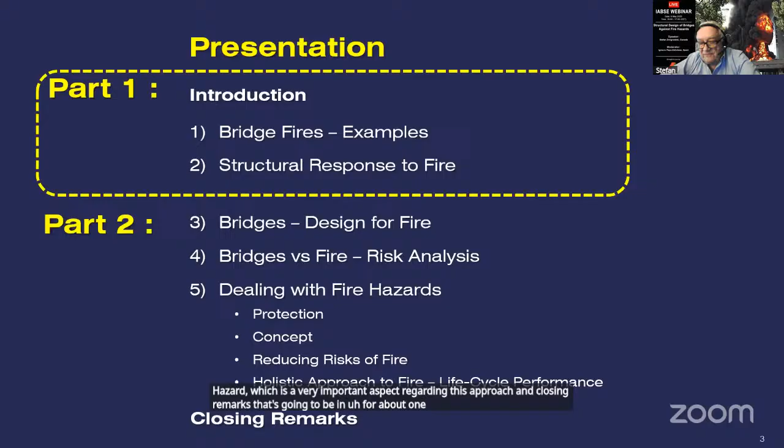Part 2 will be dedicated to the design of bridges for fire, risk analysis, as well as dealing with fire hazard, which is a very important aspect for this approach, and closing remarks. That's going to be in about 1 month, in June, the 5th or 6th, to be precise.

So let's go to the first part. I have to mention this has been prepared some time before, and we refer to publications that are about 10 years old, but still very appropriate.

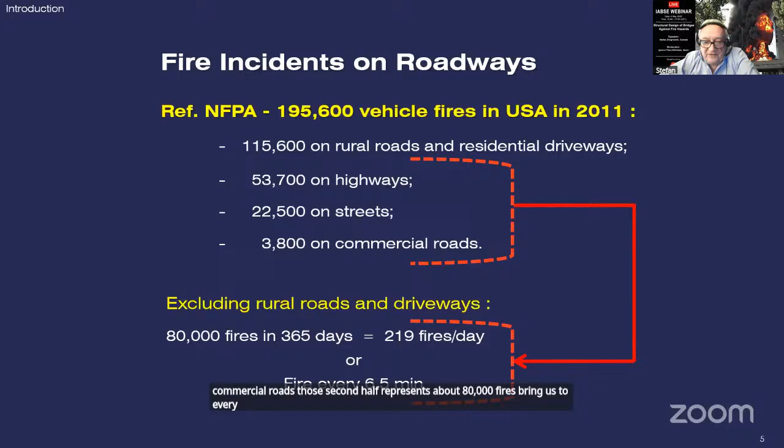The first is an NFPA report published in 2011, reporting fires in the USA: about 200,000 which have happened, most of them on rural roads and driveways, and half on highway streets and commercial roads. That second half represents about 80,000 fires, bringing us to a fire happening every 6.5 minutes in this period.

Another reference is a survey done by McCabe reporting causes of bridge failures based on the reasons. Most are hydraulic, followed by collisions, overloading, deterioration, and fire, which represents about 3% of collapses reported. But before earthquakes—and why I underline why—other causes like ice, fatigue in steel, design problems, etc., each represent less than 1%.

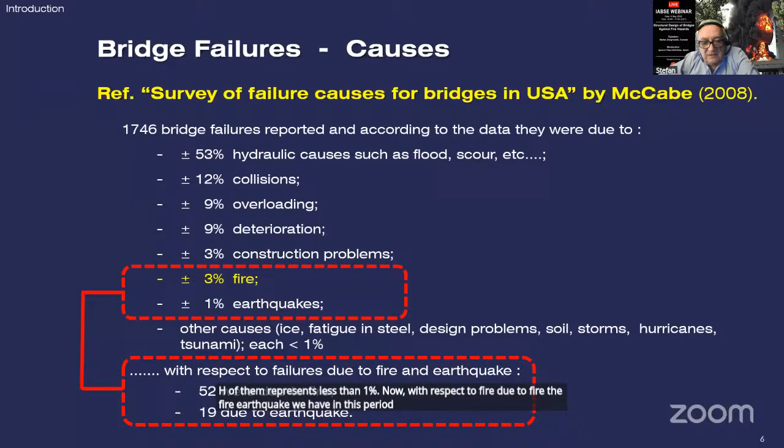With respect to fire versus earthquake, in this period we have 52 due to fire and 19 to earthquake. Another reference is a technical paper reporting bridge failures over a period of about 30 years, where fire is also mentioned as one of the reasons, compared to wind and earthquake, and I'll say why those are important in a minute—they represent a high number.

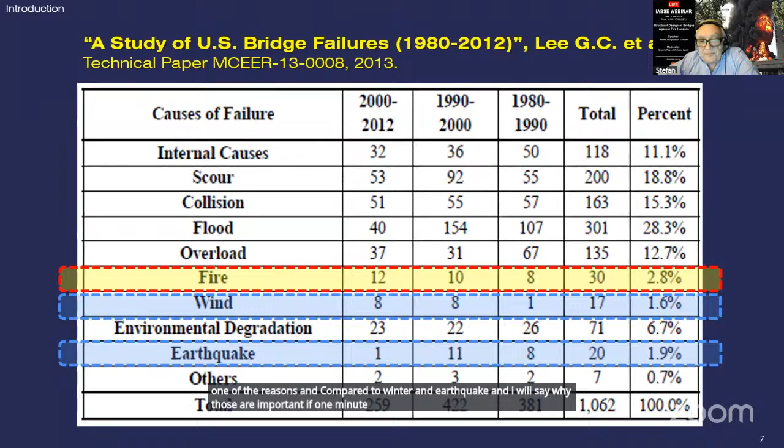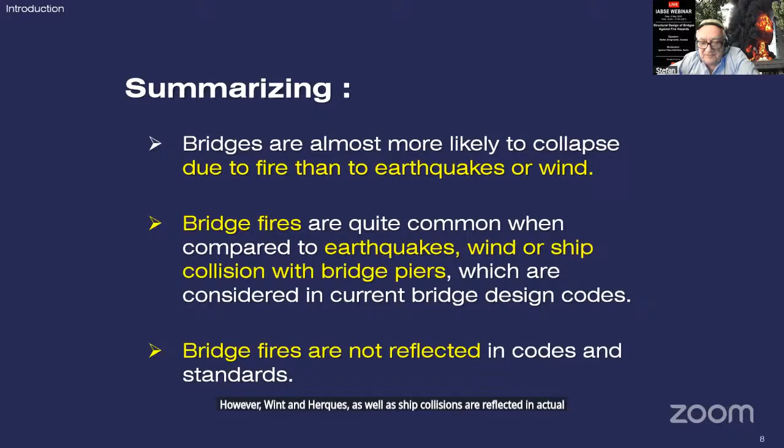So summarizing, bridges are more likely to collapse due to fire than earthquakes and wind. However, wind and earthquakes, as well as ship collisions, are reflected in actual codes and standards for bridges, but not fire. So let's go to the examples of bridge fires.

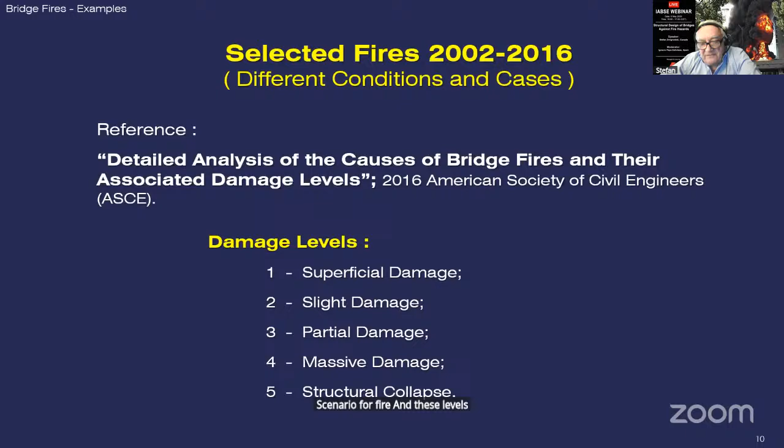These are detailed in an analysis of causes published in 2016 by the American Society of Civil Engineers, according to 5 levels. There are about 20 cases we show here, with different levels of damage and different fire scenarios. These levels go from 1 to 5, from very superficial to complete collapse.

Level 1 is defined as minimum damage, not affecting the structure of the bridge. It's superficial, without any important impact on the performance of the bridge.

Level 2 is slight damage, which requires some repairs. This could be concrete spalling, but not exposed rebar—blackening of concrete, slight damage to steel beams.

Level 3 is partial damage, requiring replacement of some structural elements. Level 4 is massive damage—considered damaged but not collapsed. However, due to the extent of deterioration, bridges are damaged and should be demolished. Level 5 is structural collapse, where total collapse takes place. So the two last levels, 4 and 5, could be qualified as total loss of the bridge.

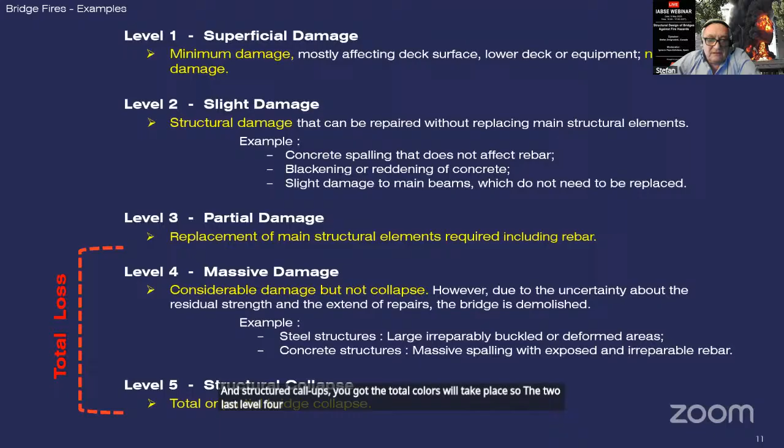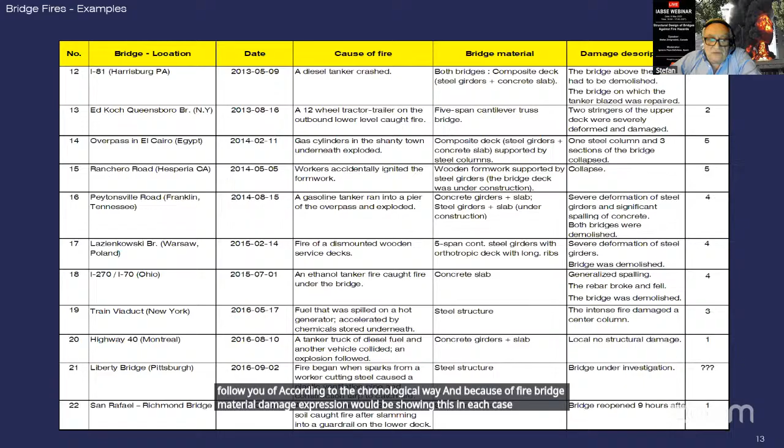Let's go to this list. It's divided into two parts with the data, and we'll follow it chronologically—cause of fire, bridge material, damage level—shown in each case. We have 22 cases, let's start with the first one.

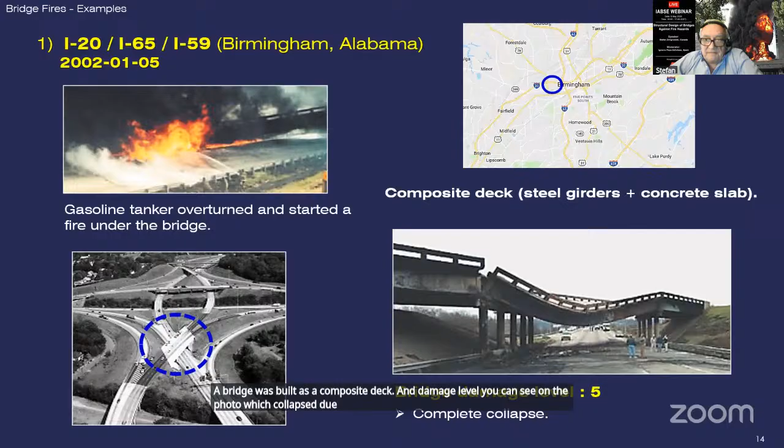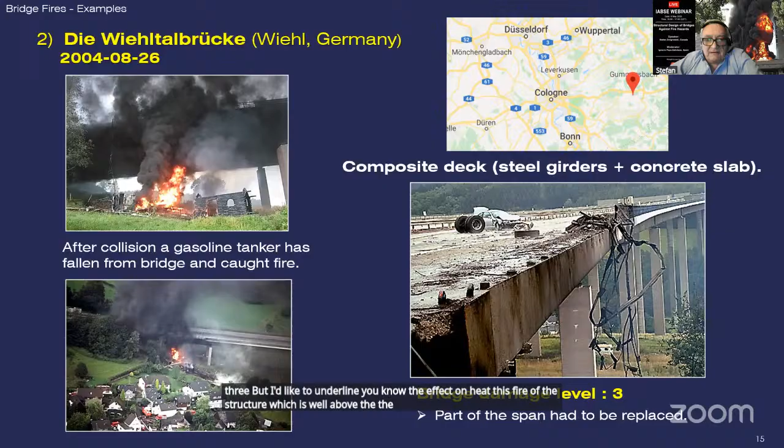Die Wiehltalbrücke in Germany is a very interesting case. The fire started on the highway, and the tanker had fallen. You see the fire on the left side of the screen, well below the deck structure, and the damage is shown on the right side below. You see the extent of damage, which required partial replacement of the structure. It's qualified as level 3. But I'd like to underline the effect of heat from this fire on the structure, which is well above the burning of the tanker.

Another case reported is less relevant in terms of fire, but it's a bridge in Greece where there was loss of cables, probably due to lightning. The cause is not certain.

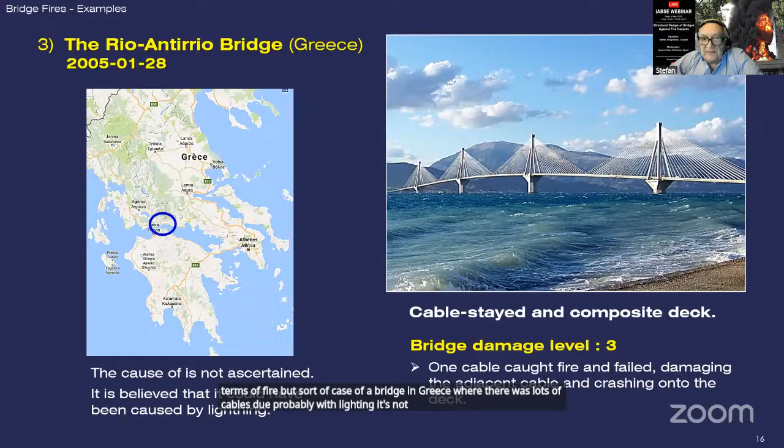Another one is the Queens Expressway and Roosevelt Avenue intersection in New York City. There was a crash of a tanker under the bridge. The bridge was under construction—only steel girders were in place—and it suffered total collapse, damage level number 5.

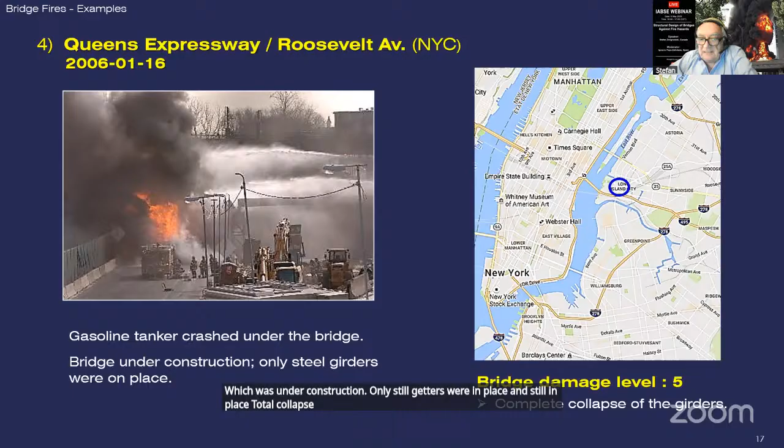Mezcala Bridge in Mexico was a fire of a truck carrying coconut, which collided with buses. There was loss of a cable, with limited damage to adjacent cables. This is relevant in terms of impact on the cable, and it should be underlined that it's part of the design approach for cable-stayed or suspended bridges, regarding impact on the supporting structure.

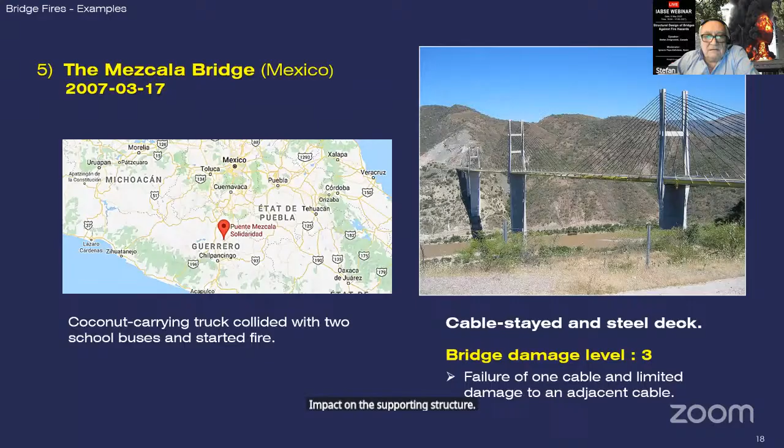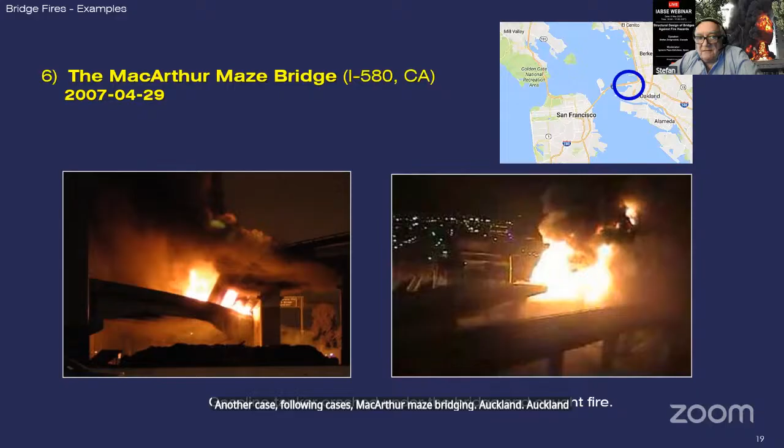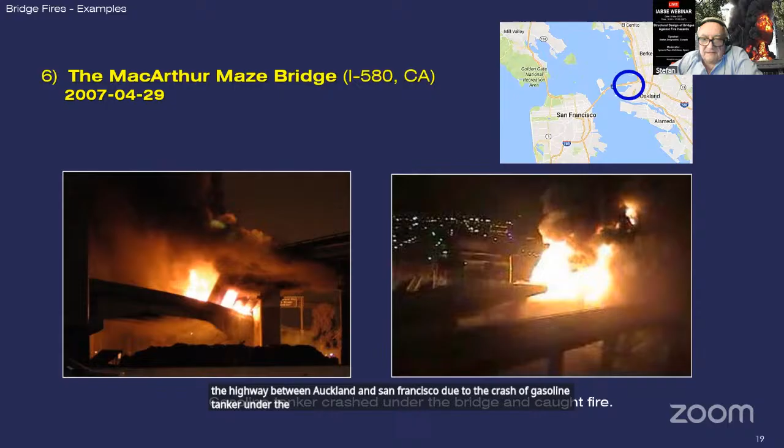Another case is the MacArthur Maze Bridge in Oakland, on the link of the highway between Oakland and San Francisco, due to the crash of a gasoline tanker under the bridge. You see images from when it happened at night, and the result here. This was very important because it was a connection between these two major cities. On the right side you see San Francisco in the upper part; the bridge is located in Oakland. A 50-meter-long section collapsed due to this fire.

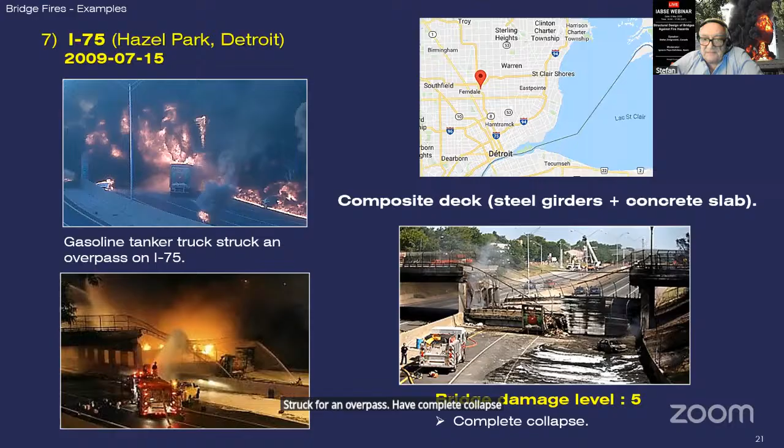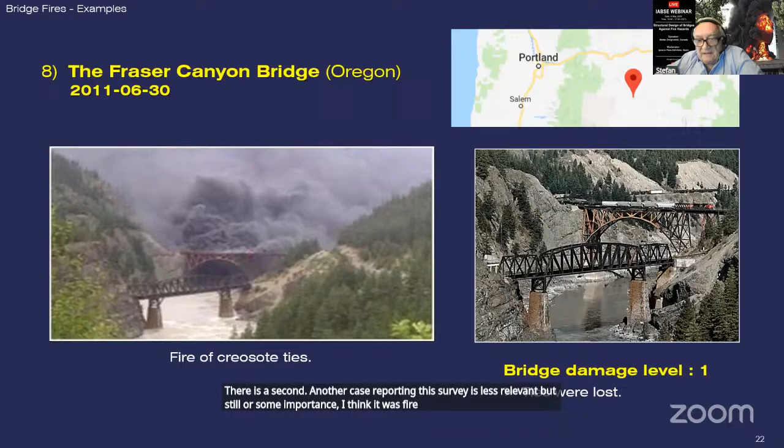Another case reported in this survey is less relevant, but still of some importance—I think it was a fire of ties. It could be repaired, of course, very easily.

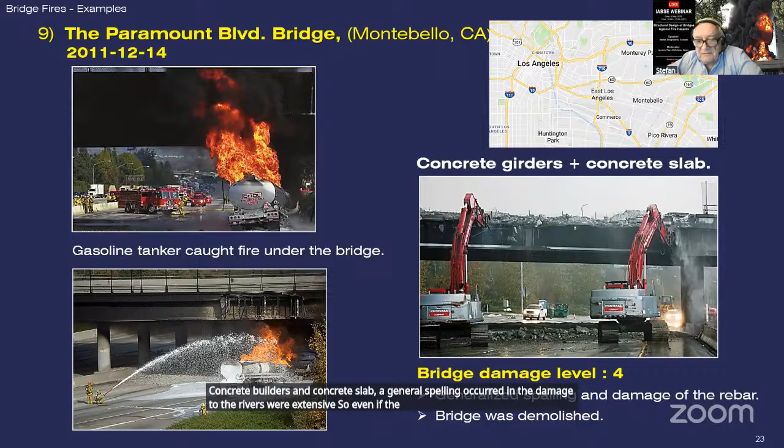Another case from the U.S.—Montebello, California. Another gasoline tanker fire under the bridge, and this bridge was built with concrete girders and a concrete slab. General spalling occurred, and the damage to the rebars was extensive. So even if the bridge didn't collapse, it was demolished due to the extent of damage.

We're in Germany, Dormagen.

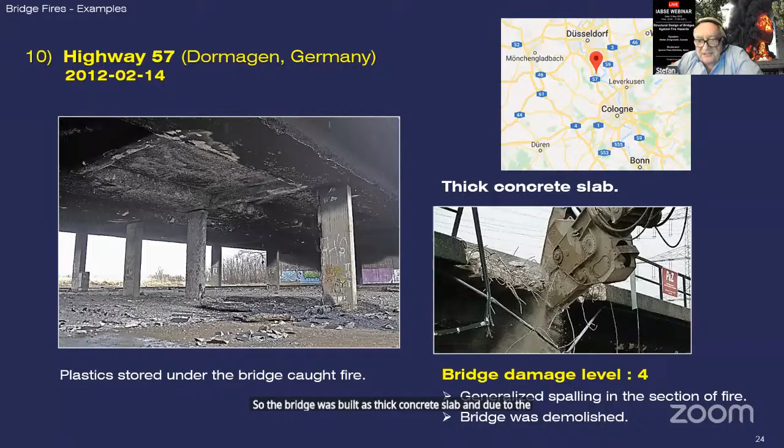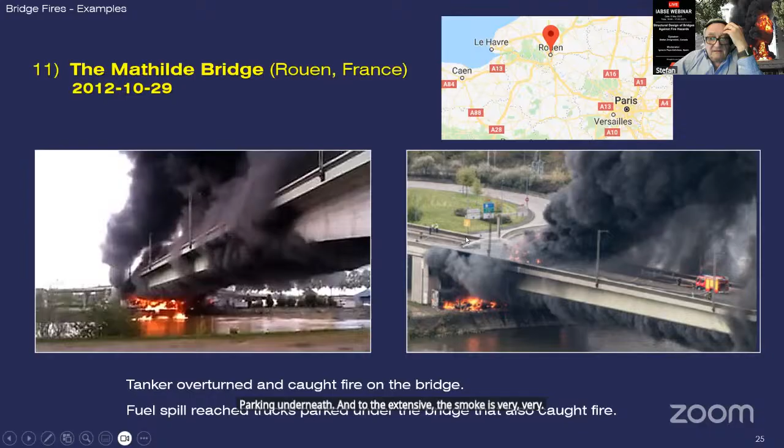A very interesting case of the Mathilde Bridge in Rouen, France, where we see the photo on the right, the fire under the bridge on the shore. The fire, however, the incident started on the bridge, where the tanker overturned, caught fire on the bridge, and the fuel, the tanker remained on the deck, but the fuel spill reached trucks parked under the bridge, which caught fire as well. So the damage of the fire was basically due to the trucks parked underneath, and the extensive smoke is very, very appalling. The result you can see here, in the section where the trucks parked under the bridge, there is severe deformation and damage to the steel structure. Part of the bridge had to be demolished.

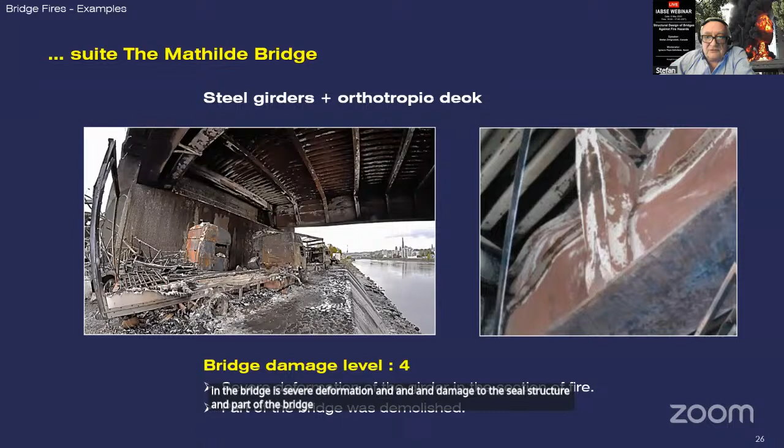Coming back to the United States, Pennsylvania, there were two bridges involved in the fire of a diesel tanker. Once again, we have dangerous goods, a very, very high combustible load. One bridge had to be demolished; the lower bridge could be repaired. It's again steel girders and concrete, and the extent of damages due to this fire was very important.

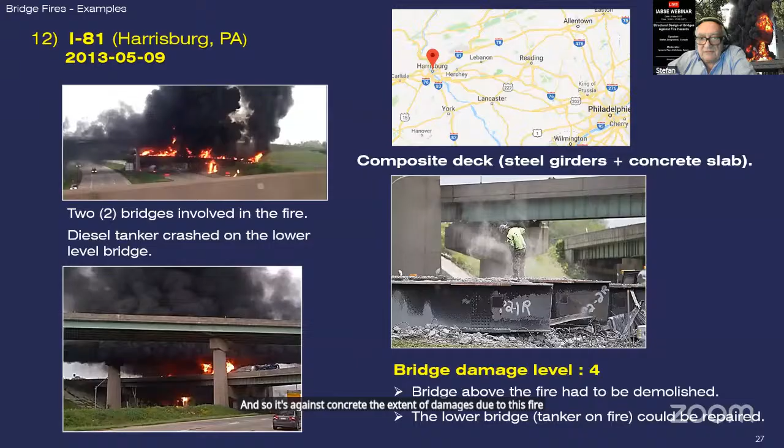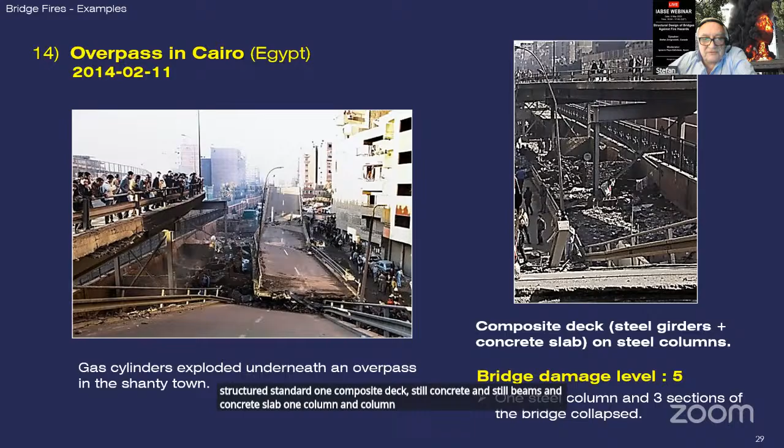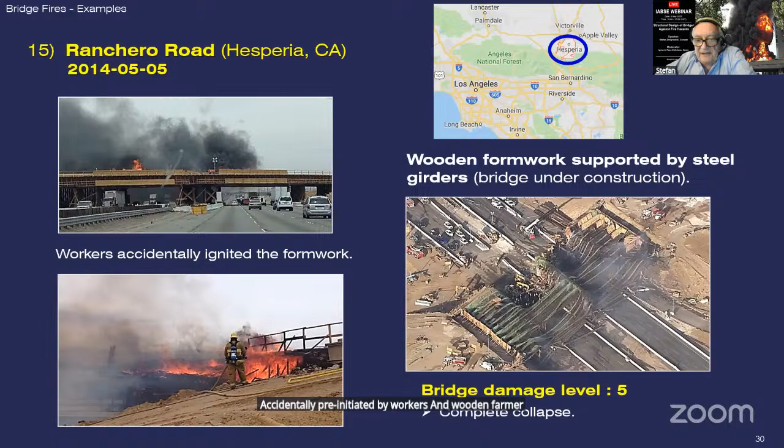We are in California, Ranchero Road in Hesperia. It was a fire caused during construction, accidentally initiated by workers, and the wooden formwork caught fire, and everything that was in place collapsed.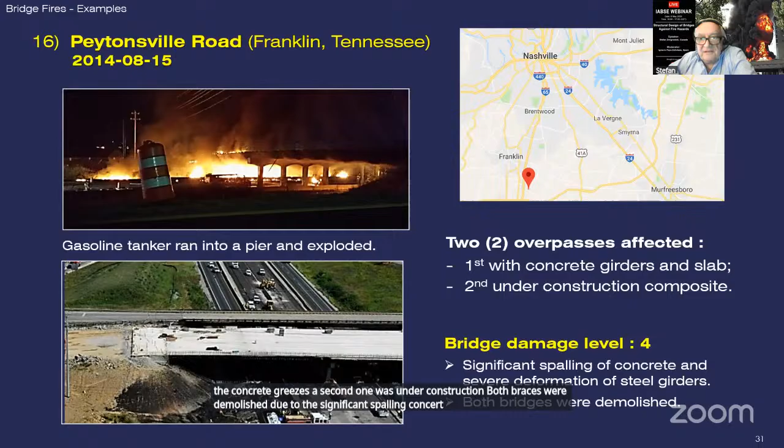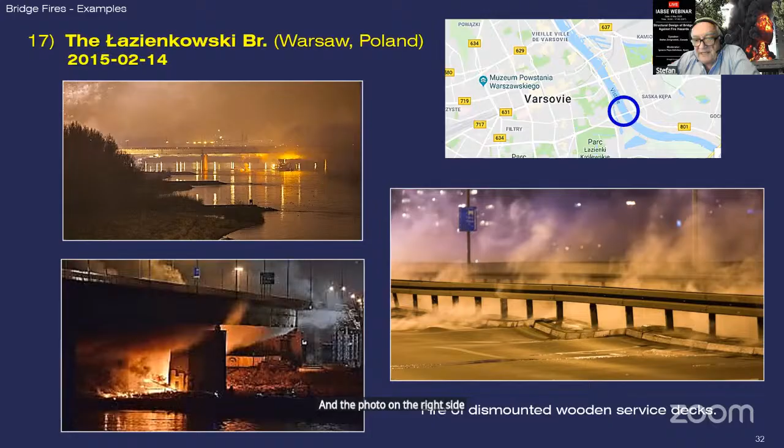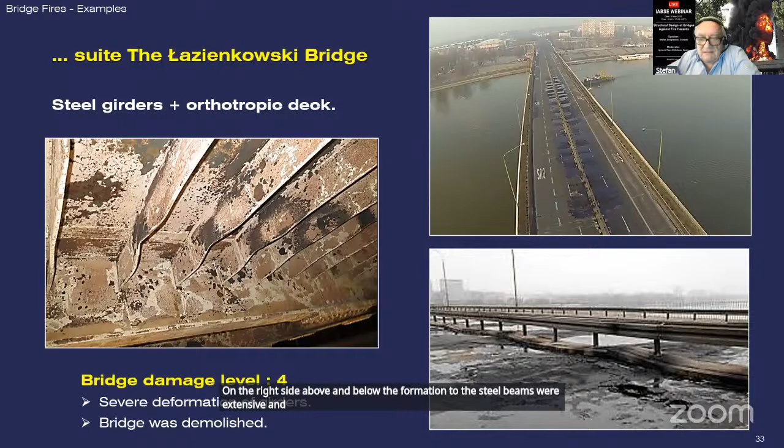The Łazienkowski Bridge over the Vistula River in Warsaw, my native city, was caused by fire of dismantled wooden service decks started on the shore. You see on the left side below the fire under the bridge, and the photo on the right shows the fuming deck during this fire. The result of this heat you can see on the right upper side is quite extensive. The steel was heated so heavily that the asphalt was in the state you can see on the right side above and below. The deformation to the steel beams was extensive, and the bridge had to be completely demolished, total replacement.

Another case of a tanker, this one ethanol, also a very high level of combustible load involved in this fire. The structure was concrete, and it's a very good example to see the effect of spalling and the impact on the rebar, which was broken and fell. The bridge was demolished after this fire.

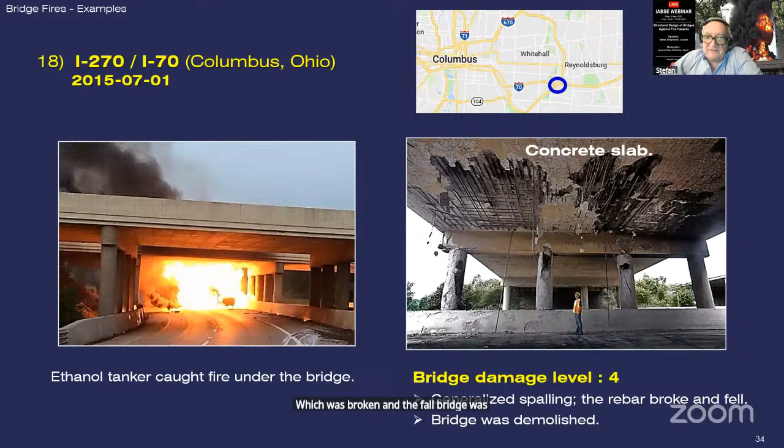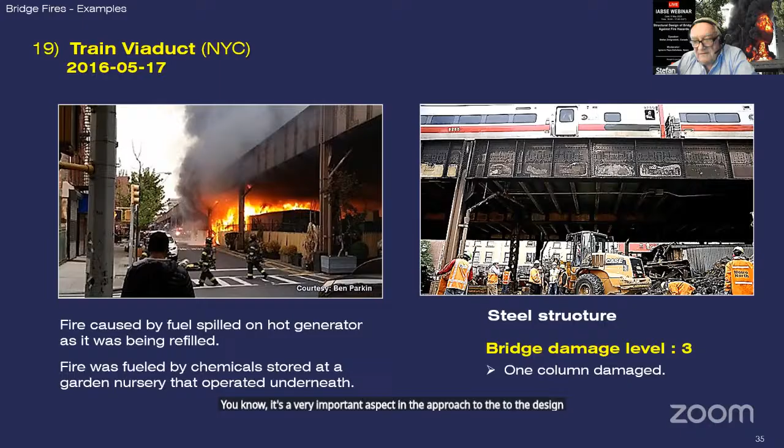Train viaduct in New York City, another interesting case because of the material stored under the bridge, or other use of the space. The fire started from fueling of a generator, and it spread to chemicals stored in a garden nursery in operation. It was quite an important fire with impact on the structure. We can see on the right side one column was damaged, level 3. But the use of the space underneath the bridge is a very important aspect in the approach to design and assessment of fire risk.

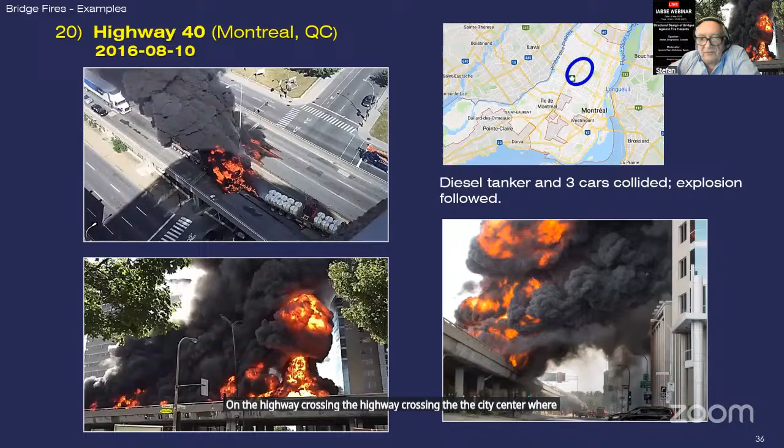Now we are in my actual city, Montreal. There was a fire, a very impressive one, on the highway crossing the city center, where a diesel tanker collided with three cars, and that's what happened. But the damage was very limited. The fire was on the bridge, so it required only local cosmetic intervention afterwards. There was no structural damage, no structural problems.

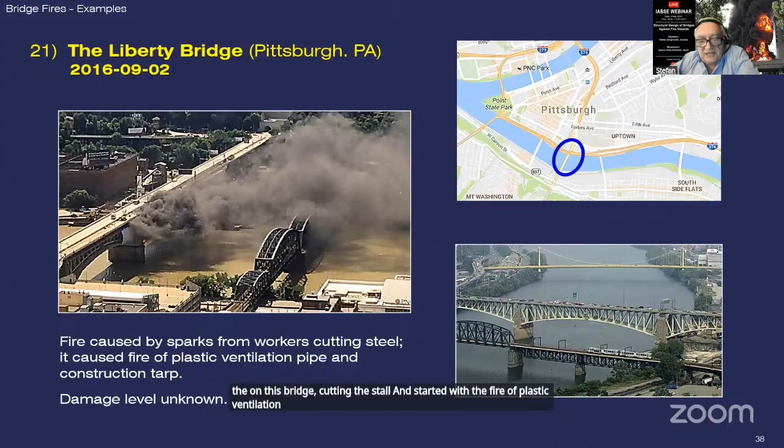Bridge in Pittsburgh, Pennsylvania, where some not well performed works by people working on this bridge, cutting the steel, started a fire of plastic ventilation and pipes and construction tarp. The damage level was unknown.

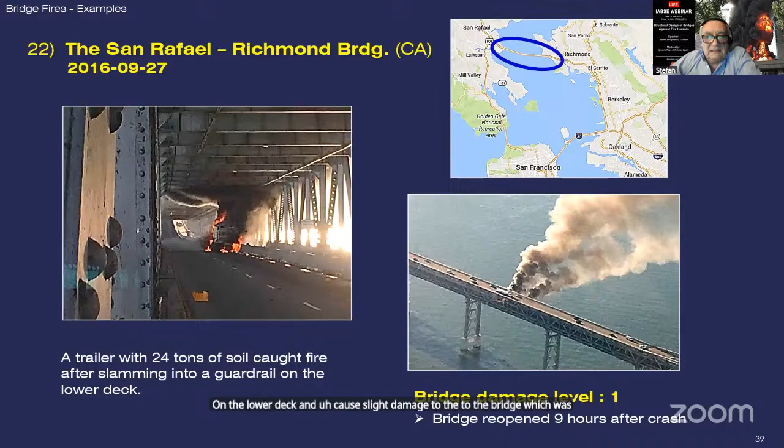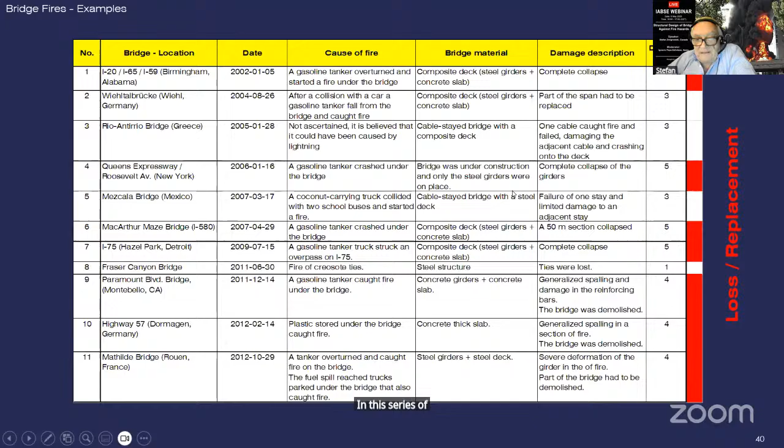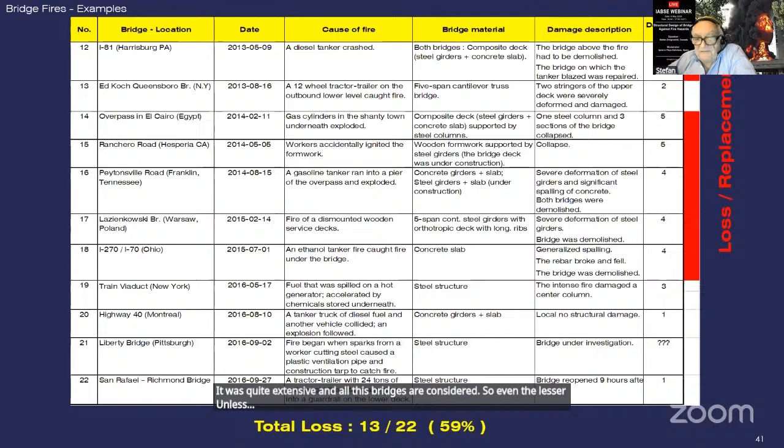What was the economic impact? It's not something discussed in every case, but for the fire of the bridge in Oakland, we have data, and it's very interesting to compare the reconstruction cost with the economic impact. The reconstruction was about $9 million in 2007 dollars, and economic impact represented 26 days at $6 million per day, so 17 times the reconstruction cost.

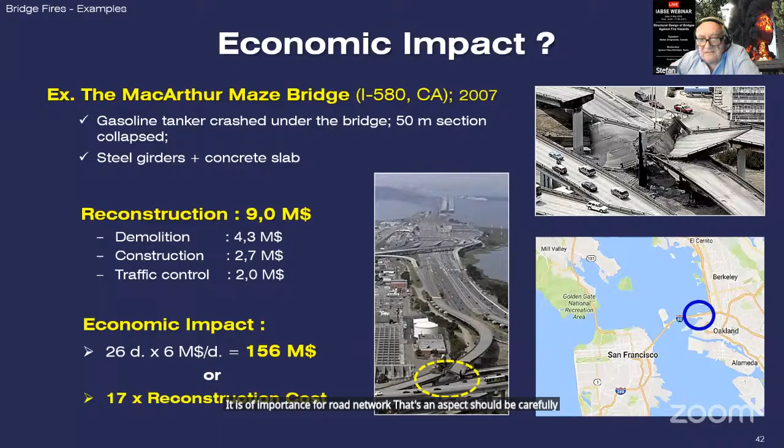So the economic aspect is very, very important, depending on the category of the bridge, and its importance for the road network. That's an aspect that should be carefully evaluated, considering the approach in terms of design and risk factors.

Some observations arising from this review of over 20 cases: fires caused by gasoline tankers are most devastating. It's natural, because the potential for fire load is enormous, and the speed of the fire is very important. Of course, it should be underlined that when the structure is in direct contact with the flames, the damages are more important. But we have to be careful.

The case of the Wiehltalbrücke in Germany showed that even a big, free space with free ventilation exposed to air doesn't necessarily mean that the bridge is safe. Most of the issues will be with steel girders, which we'll discuss later in terms of vulnerability of type of material to fire.

For other materials like scaffolding, formwork, etc., built of wood, this represents a risk. Spaces under bridges are a very important aspect in terms of risk factors. There are 3 or 4 cases where that was the case.

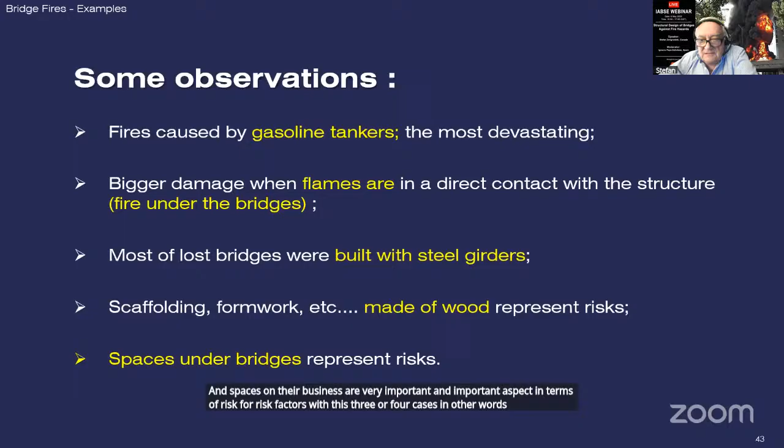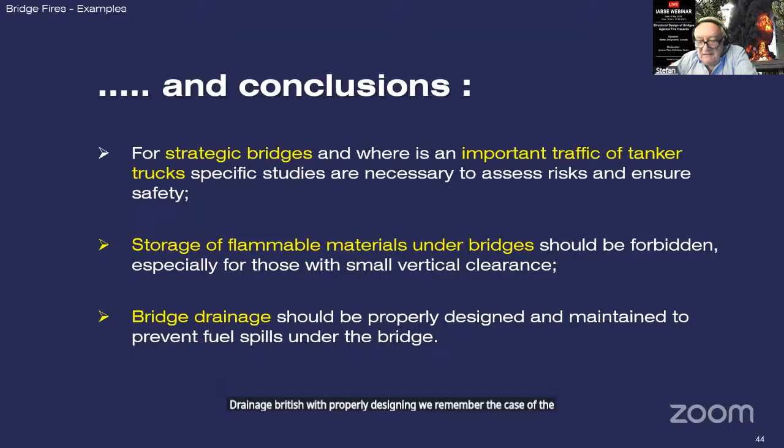Concluding, strategic bridges with important traffic of tanker trucks require specific studies, because of assessment of risk and the safety and security which should be targeted. Storage of flammable materials under bridges should be forbidden, especially for bridges with small vertical clearance. Drainage of bridges should be properly designed. We remember the case of the Mathilde Bridge in Rouen, France.

The next step is to look at the structural response to fire. There are 2 aspects: performance of concrete and steel, and temperature loads and analysis. We put steel bridges in the bracket because the problem of steel structures is less relevant in terms of analysis, since those bridges, under an important fire, just collapse.

So let's look at the material performance of concrete and steel. We used to refer to the fire curve as far as fires are concerned. There's a reproduction of what we can find in Promat flyers, and for bridges, this modified hydrocarbon curve. You have time below, and the vertical axis is temperature. We can see that very high temperature doesn't take too much time to reach the level of 1,000 degrees Celsius.

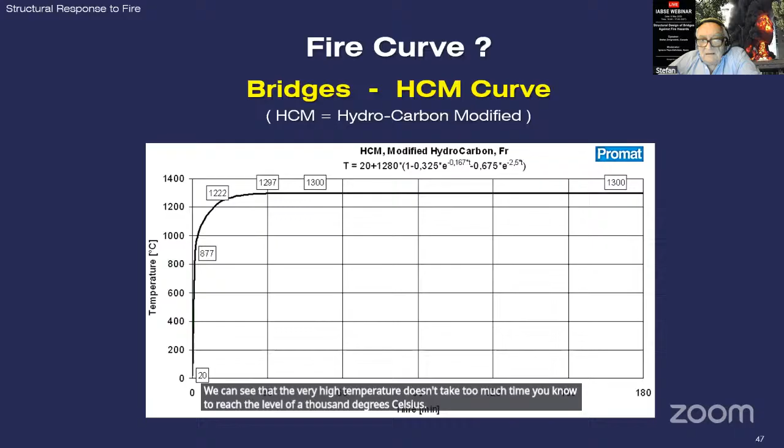Those who are familiar with tunnels know the aspect of fire safety and security of tunnels is well known. Much more publications were dedicated to tunnels, and there were significant changes in codes and guidelines on how to deal with this aspect, because of a series of fires which took place in Europe by the end of the last century.

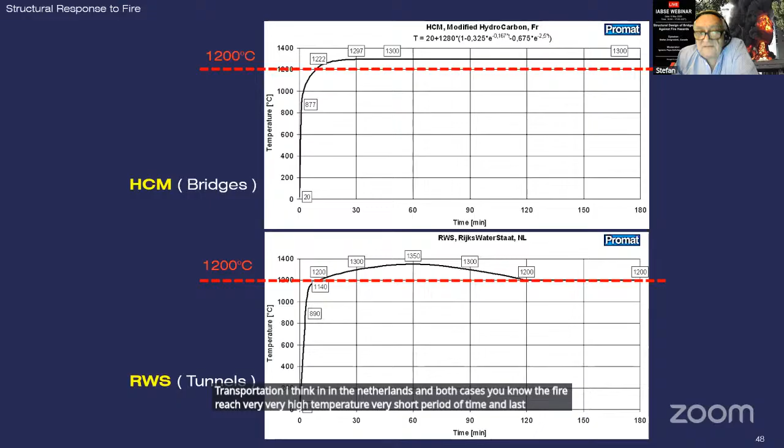Now, how does the material behave? In case of concrete, the loss of resistance starts at 300 degrees Celsius. At 500 degrees, we've witnessed important creep and deformations, and in practical terms, the performance limit is 600 degrees Celsius. The one for steel and rebar is about 500 degrees Celsius, with, of course, some losses starting well below that.

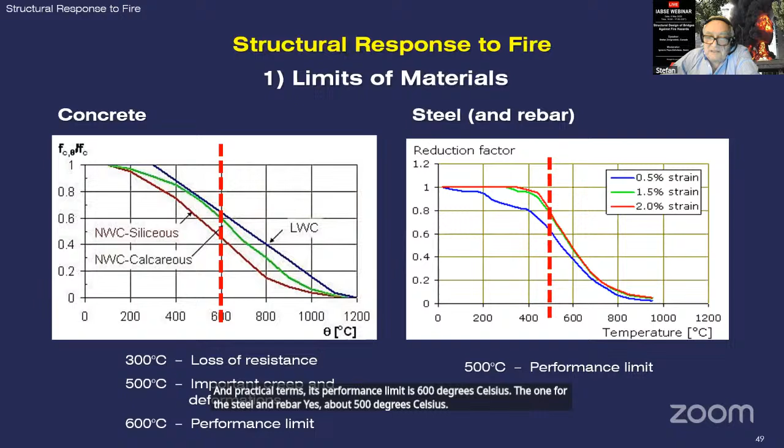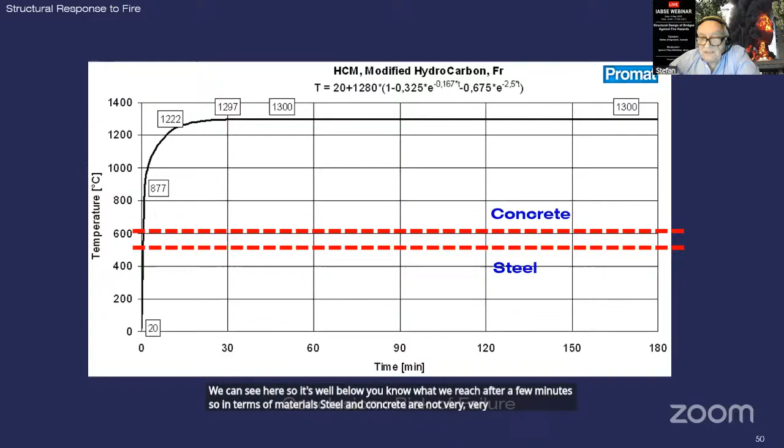So where are these limits on the fire curve for bridges? We can see here that it's well below what we reach after just a few minutes. So in terms of materials, steel and concrete are not very, very well equipped to resist fire.

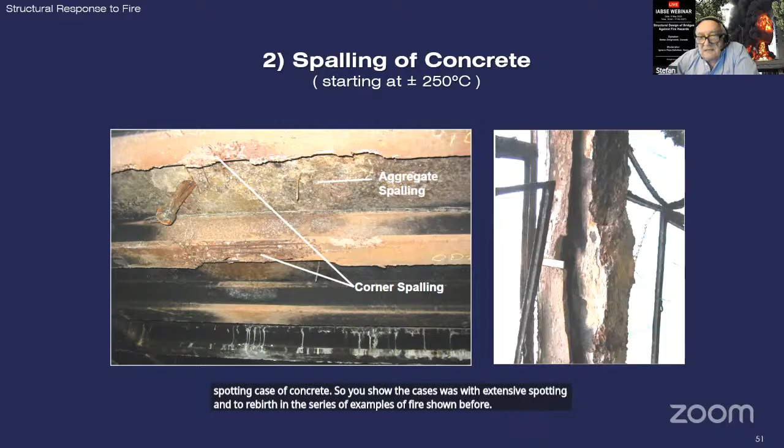That was as far as material is concerned. But you have also another phenomenon: spalling in case of concrete. You saw the cases with extensive spalling and rebars in the series of examples of fire shown before. And that's how this does look like.

There are different types of spalling, it should be underlined. Here you see the aggregate, corner, surface, explosive, etc. Time of occurrence, nature, violent, splitting, popping, cracking - you can name it, we have everything. It depends on a series of...

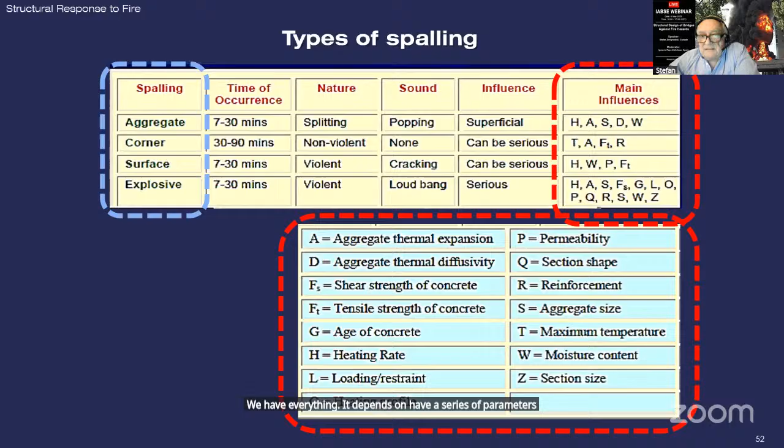parameters that affect the rebar once it's exposed. So the problem of performance of concrete is related basically to how rapidly this spalling occurs and how rapidly the rebar is reached. So the concrete cover becomes a very important parameter in design.

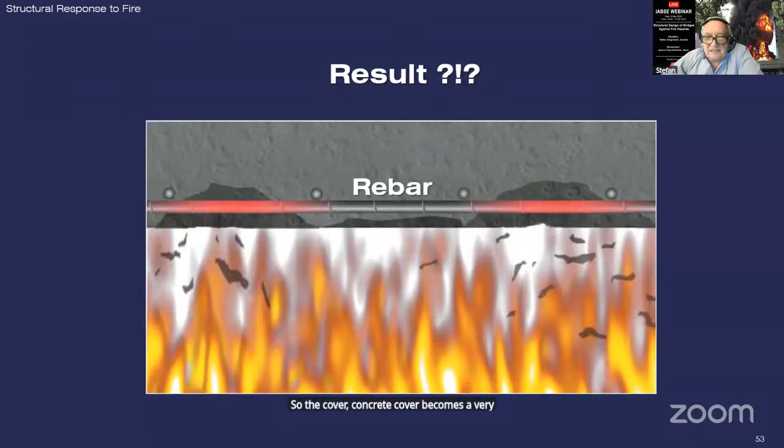Let's show you the mechanism of spalling, which some of you perhaps are aware of - the use of polypropylene fibers, which eliminates or reduces the stress in the section and allows concrete to survive. The problem with those polypropylene fibers is they have to be placed in the section exposed to fire, but when we pour the concrete, it's not necessarily something easy to control.

Temperature loads and analysis - I mentioned before that we use concrete bridges because of some important aspects, and this is also an element considered in the case of tunnels, where this temperature exposure is important, at some level where the structure can sustain the fire loads.

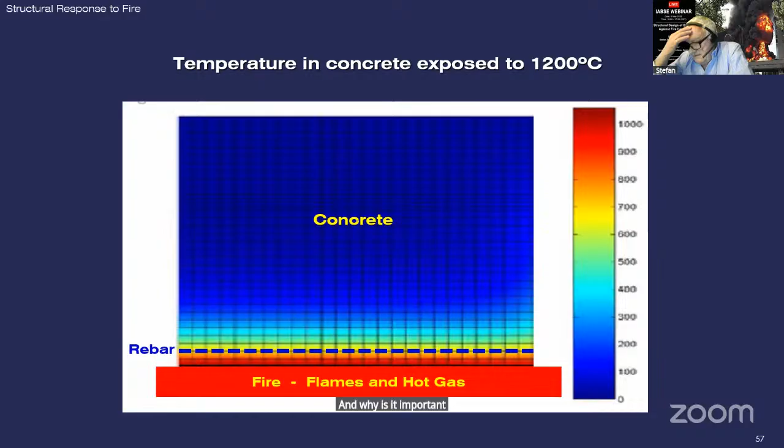And why it's so important is because of the nature of the material. Concrete is a very poor heat conductor. So when exposed to fire, very high temperatures - we show on the right side the scale, it's about 1,000 degrees Celsius - the very first layer of concrete is very hot, but then it diminishes, and the upper part is cold, basically.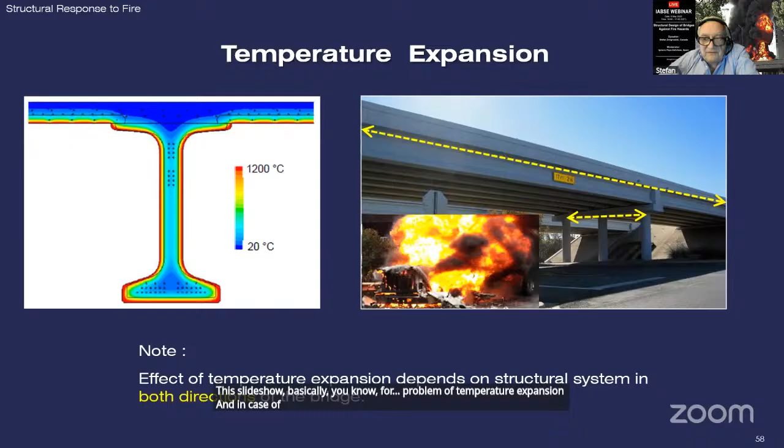But the effect, generally speaking, of temperature depends on the structural system, in both directions: expansion, one, and temperature gradient, the second. This slideshow basically shows the problem of temperature expansion, and in case of bridge structure, we have obviously two directions to take care of.

Now as far as gradients are concerned, it's a little bit more complicated, because any hyperstatic structure behaves differently under temperature exposure. This is very important because the mechanical and physical properties of concrete depend on temperature. So in any analytical approach, we have to consider this parameter.

So in terms of time and how temperature reaches the material - I mean in the material, not the whole material, but any part of material, starting where the part is exposed to the heat and going to the part which is less heated.

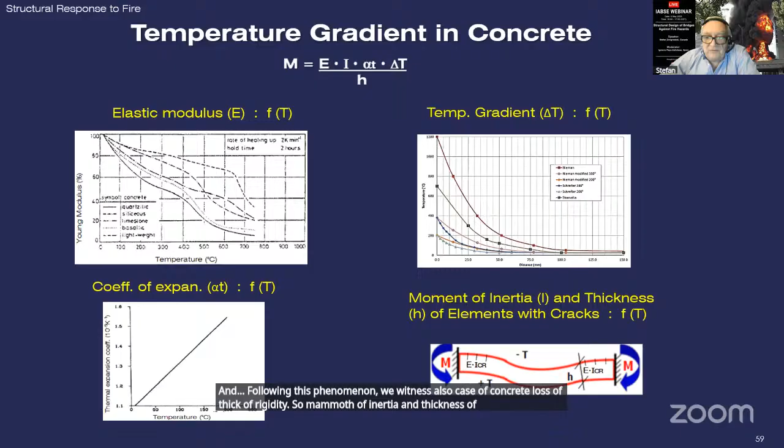And following this phenomenon, we witness also in case of concrete loss of rigidity. So moment of inertia and thickness are affected by cracks which appear with time. Capacity - we mentioned the capacity problem of performance limits.

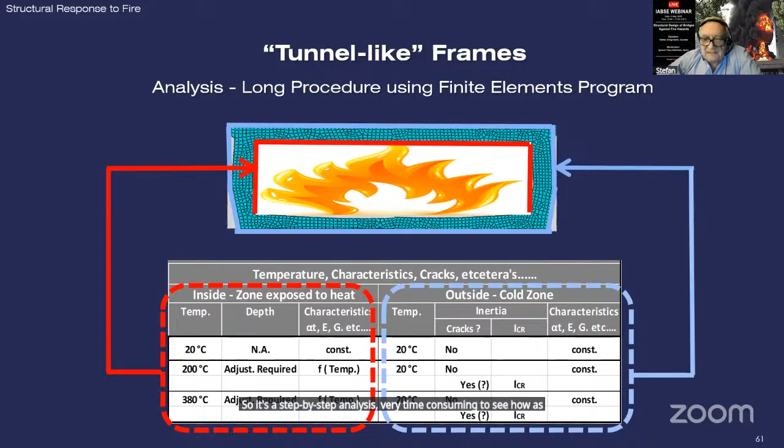So let's summarize. I'm going to have more time for eventual questions, and the second part would deal with other aspects, as I mentioned, about one month. So you're welcome if any questions arise from this overview.

In Europe, that's a good question. I'm sitting here in Montreal, in Canada. Maybe Nacho, you could perhaps react to this question, but I'm not aware of any impact. A very good question, by the way.

Thank you, it's very important. The Eurocodes were developed for buildings, so in theory they cannot be applied to bridges because there is a specific Eurocode for loads on bridges, but they do not talk about fire. So we are using the Eurocodes to consider the evolution of material properties and structural models. But the fire loads are not included in the Eurocode. So you can use them as a basis, but we are a little bit lost. That's why there is so much research and so many research papers published on the topic.

So Gulam, I don't know if you want to add something, if you are satisfied with the response.

So he says that basically, the Eurocodes are done for buildings. They do not apply for bridges, but there is a lot of interesting information there that can be useful to analyze bridges vis-a-vis fire hazards. Okay, and then the second question.

It's a very good question. Bridge fires are not covered by codes and standards, and I'm referring here to my North American experience. There's nothing there. We have some situation, as you referred to, for buildings in Europe. We have the same situation here in North America, reflected in case of buildings with some degrees of protection, but we know very well what's the difference in terms of fire load between materials in buildings and high risk vehicles like tankers.

There are some cases I was involved in, in terms of risk potentially, and it was very surprising to the owner. We know of some problems experienced in projects where the firemen were involved too late to have any relevant impact on the concept.

So the question is very good, and that's the reason also why we decided to found this task group, to make people more aware of the problem, and we targeted guidelines as our first approach to the product we should be focused on.

That's why for TG114 we hope to bring something interesting on the market for the overall use of our community and potential clients, to make this more comprehensive and useful in terms of approach, because our approach is not very easy. It's not a design like calculating a beam for bending. No, it is very complex and multi-parameter design, not necessarily structural. The structure is by the end of the process.

It's the risk assessment of risk. Other aspects, safety of people, is very important - the most important. I didn't talk about safety of people in case of bridges because it's very simple: people are evacuated, they are not there, they just leave the bridge. The very big problem is in terms of tunnels. So any structure is somewhere between bridge and tunnel in terms of risk for humans.

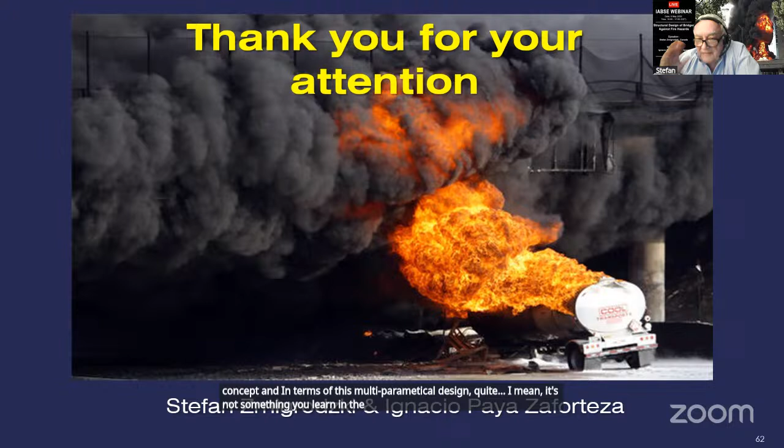That's the very first step in terms of approaching the concept and this multi-parametrical design. It's not something you learn in the university. In my time, it was nothing. I don't know today, but it looks like it's still a little bit tabula rasa. We have to fill it with our experience in time.

Okay, so let me ask something for Roberto. He was asking about any experience with local authorities.

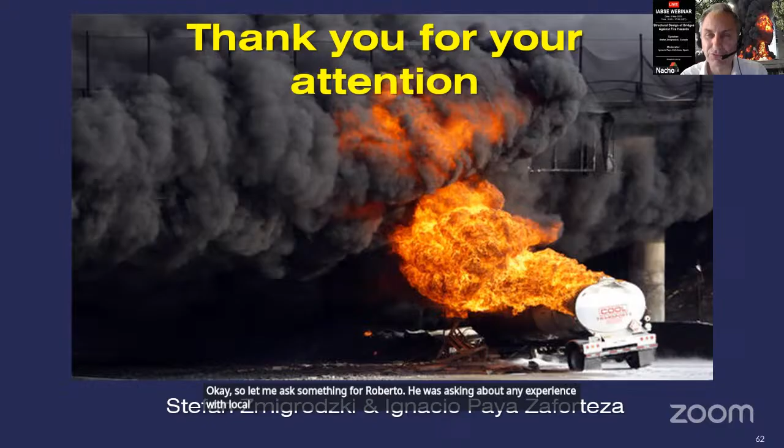Once we got a request to assess the fire resistance of a bridge, a composite steel concrete bridge outside of Spain. And the terms of reference just didn't make any sense, because they wanted to verify the safety of the bridge considering the standard fire, the ISO curve, but this is a cellulosic fire, so it is expected to be useful for buildings, but not for bridges.

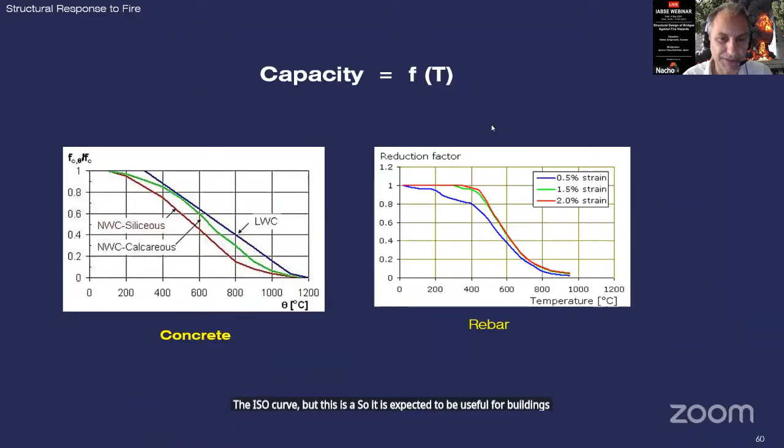They wanted to apply the cellulosic fire instead of the hydrocarbon fire, and secondly they wanted to apply this fire load uniformly along all the bridge girder lengths. This doesn't make sense because if you remember the Montebello bridge fire image, you always have a peak temperature right above the fire, and temperatures decrease as you get away from the origin. So we said this requirement didn't make sense, that a proper performance-based design should be done, and they never replied.

So that was our experience. Then we have a question from McGill, from Lakabath Chandraskar - sorry for my pronunciation - asking about post-fire damage assessment techniques. Stefan, do you want to comment on this? Let me react, since you've been involved in a series of investigations and assessments post-fire.

There isn't a lot of knowledge on this, especially from the authorities, because structural fire engineering isn't taught at most universities. So people don't have much knowledge about this, and very often they are very conservative and say, let's demolish this. But if you do additional studies, maybe you can save most of the structure and save time in the recovery phase. This is very important, as Stefan pointed out for the case of the MacArthur Maze bridge in California. For example, we did an assessment in Valencia of a bridge that had a fire.

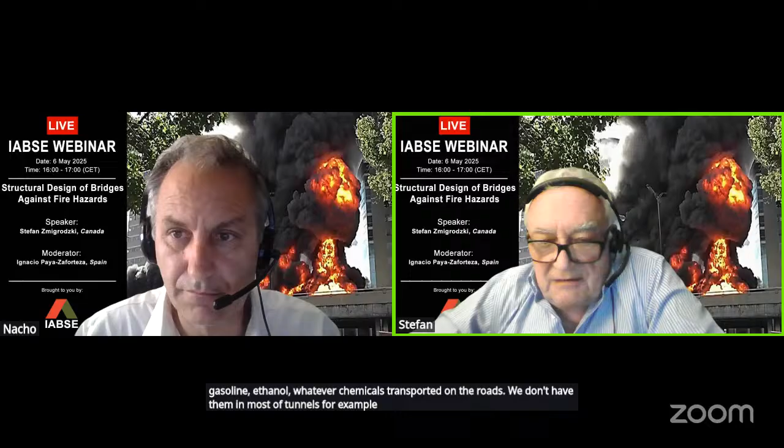With gasoline, ethanol, whatever chemicals transported on the roads. We don't have them in most tunnels, for example, but bridges are construction where the risk of exposure to those materials is huge, and that's why the risks are very different. Any variation in parameters like material or protection becomes less relevant when we're talking about concrete.

We're not in a building where a few centimeters of concrete protection for columns is enough to allow for evacuation of people. We're in a world where the fire load is much more important, and the fire curves we show you are something very different from the cellulosic ones we have in buildings.

Okay, so I'm posting the article with the assessment of the bridge in Valencia. I put it in one of the replies. And we had another question by Gulam Nabi.

The question is, in the aftermath of the Mathilde bridge fire, what specific structural weaknesses were identified in the orthotropic steel deck design, and how have these findings influenced current fire-resistant bridge design practices?